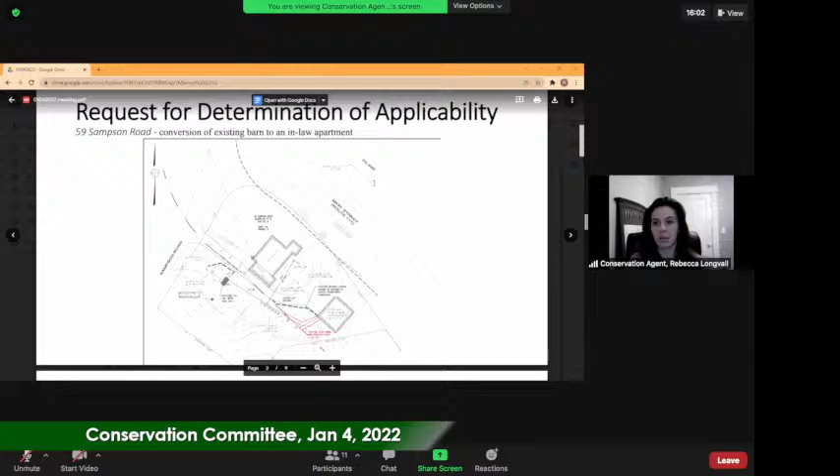I just saw your email about, he had sent me a colored plan, so he may be able to walk the commission through the project. I was curious as to what was jurisdictional, but if Ryan is able to explain that and give us an overview of what the project is and what we're looking at, that would be fantastic. Absolutely. Is it okay if I share my screen? That's fine, yes, if you're able, Ryan.

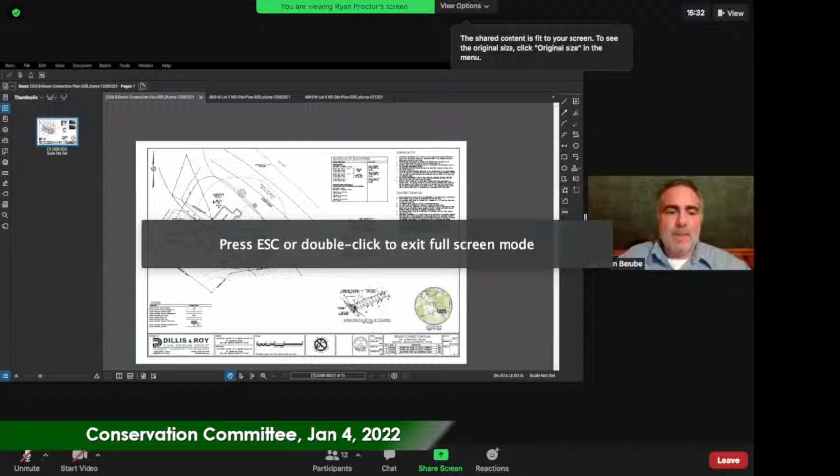Can everyone see the plan on the screen now? Yes, okay awesome. All right, so first off, thank you for your time tonight. Just for the record, I'm Ryan Proctor with Dillis and Roy, representing the applicant Brian Boyle. And as Rebecca said, Doug Story is here as well. So the proposed project, the applicant is proposing to convert the existing barn on the property into an in-law apartment, and that is going to require a connection, a sewer line connection into the existing sewer system.

A portion of the site indicated by the blue line shown on the plan, this is the 200-foot riverfront. And again, the 100-foot buffer zone eclipses the property a little bit. This is tributary to Still River, which is actually located across the road on the other side of Route 117. So as shown on the plan, we're right on the corner of Sampson Road and Main Street.

The area that's jurisdictional to the Conservation Commission, I highlighted in red here. There's just a little section of the sewer line from the barn into the existing septic system. Approximately 300 square feet of disturbance that we're proposing within the 200-foot riverfront area only. So there's no buffer zone work for this project, and again, it's just this little section here.

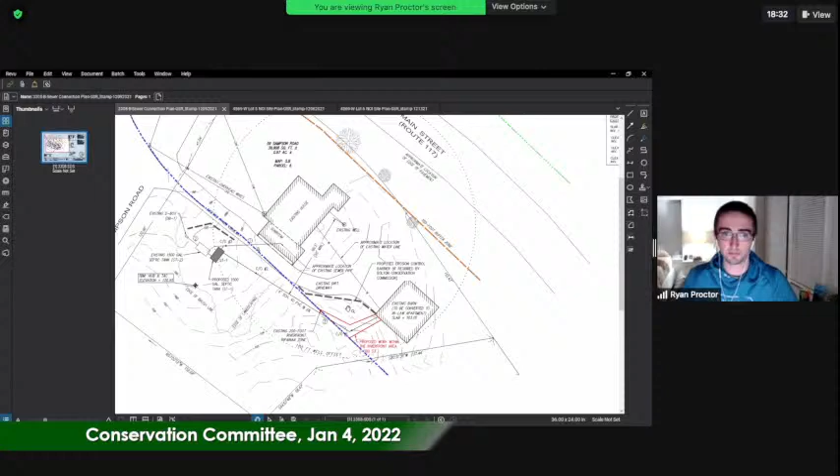We do show some erosion control. Wanted to kind of talk that through with you guys to see if you think it's applicable and necessary. There is quite a substantial natural buffer between the river by way of the yard. There's a fence along the property line, the crown of the road. There's quite a bit of structure in the way. And again, it is a pretty temporary disturbance, but that's certainly something that we're open to doing with the erosion controls.

We have submitted to the Board of Health. They had a couple of comments, which we've addressed and resubmitted. That was a little while ago, and we haven't heard anything back since, so I assume that we're all set with them. I think that's all I have to say about that. I'm happy to answer any questions or comments you may have.

I'm curious about the topography. Is it kind of going downhill towards Main Street, towards 117? Just looking at where you have the erosion controls. Yeah, in this tributary area next to the driveway here, this actually goes more towards Sampson, the way the contours are. So it's pretty unlikely that it's going to go directly down towards 117, where we're proposing the work.

I was more curious if anything would migrate the other way towards the 200-foot riverfront. Is that upland? So the high point of the site is this corner here. All right, so everything's more or less going down the edge of the driveway. It's almost going parallel with the riverfront, the line shown here. Makes sense. Other commission members, any initial questions or thoughts?

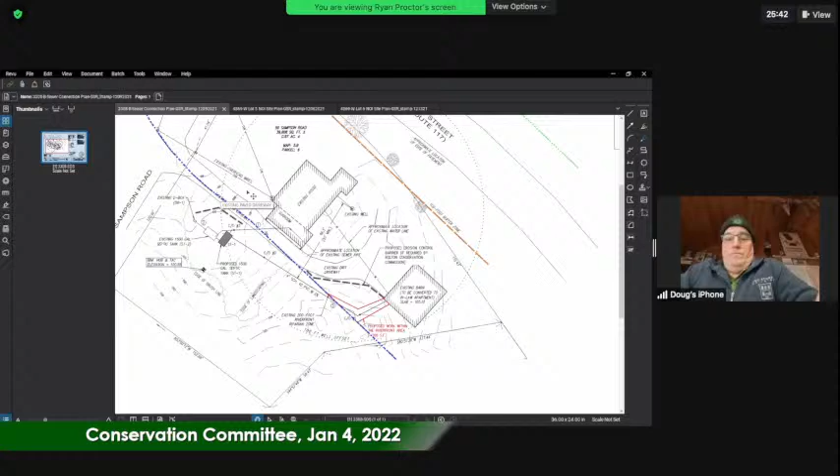As far as that's concerned, I think that's something that if the commission so chooses to, if they're comfortable with what's being proposed, I think that's something just to note, the square footage of that covered entrance in a condition. But if someone could find that while the commission's finishing their questions, I think that would be helpful, unless the commission has some outstanding requests.

Any other commission members have outstanding requests? That was a good question, Rebecca. And if we could find out the total square footage of that proposed area, or approximate total square footage, that would be excellent. I'm looking at that right now.

That's excellent. Can I ask it this time, Rebecca, is anybody here from the public to comment on this evening? Again, the public may raise their hand or utilize the chat function or physically wave, but that may take me a moment.

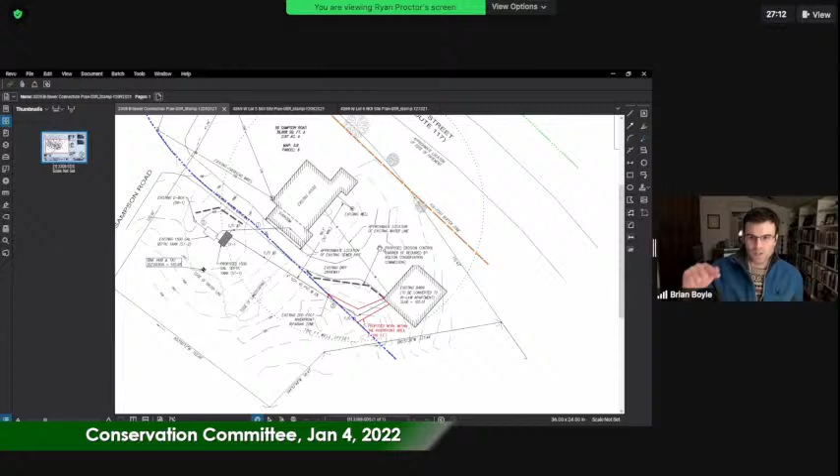Brian has raised his hand. Go ahead, Brian. Yeah, first of all, thanks everybody. Thanks Ryan and Doug for being here. I do happen to have a PDF version of the plans in case people wanted to see the covered porch, and I think the dimensions are right on there. So I don't know if somebody wanted to enable screen sharing, but I could share that.

You should be able to share now, Brian. If you'd be willing to do that would be great, I think. Okay, hold on.

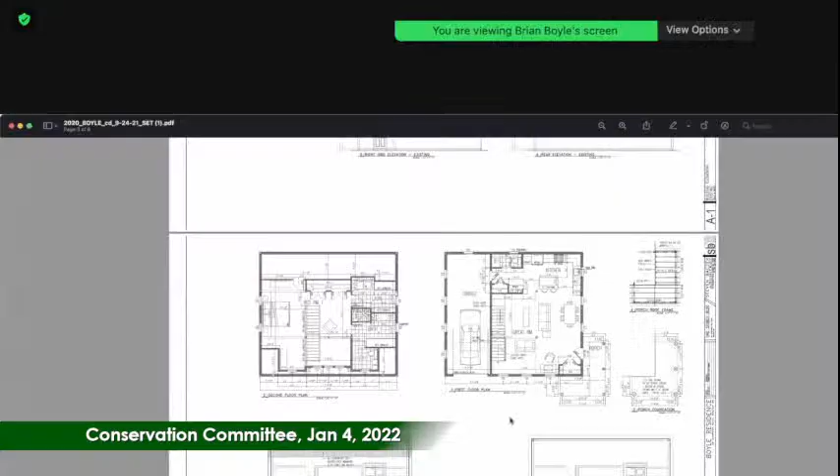It's oriented a little bit differently than you were seeing on the drawing, but this is the little covered entryway. So basically what it's doing is a relatively small wraparound porch to cover this entrance to the building. It's not going the full length of this side, and it's not going the full length there. So I think this looks like it's 8 feet if I'm reading these dimensions across.

Actually, roughly. I've got it, Brian. It's 5 feet wide in both directions, and in one the length is 11'9" on one side, and I think it's 13'2" on the other side. So it's a wraparound, it extends out 5 feet. It has 4 footings, as I said.

2 of which, or at least one, would be dug in the driveway. The other 3 would be dug on the side, and it only extends out 5 feet in either direction.

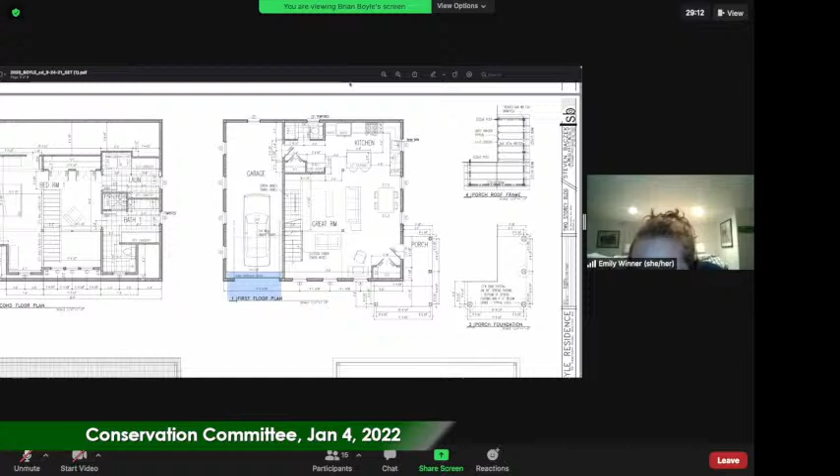Who's good enough at math to do the square footage on that quick? Okay, let me tell you what that is. I was gonna say what? Had a calculator. Well, because it's a wraparound, you have to do both and cut one off. It's 60, it's 60 plus. What is that dimension? 11.9 minus...

5, you said it's 5 wide? Yeah, so 7 times 5, 35. So 5, 60 times, plus 35, 95 square feet, approximately 90 or 95. Well, yeah, it's 5'10" wide, it's not 5 wide, it's almost 6 feet wide. So call it 6 times 12, 72, and then you're subtracting a little bit. So call it... what's it? 107. 107.

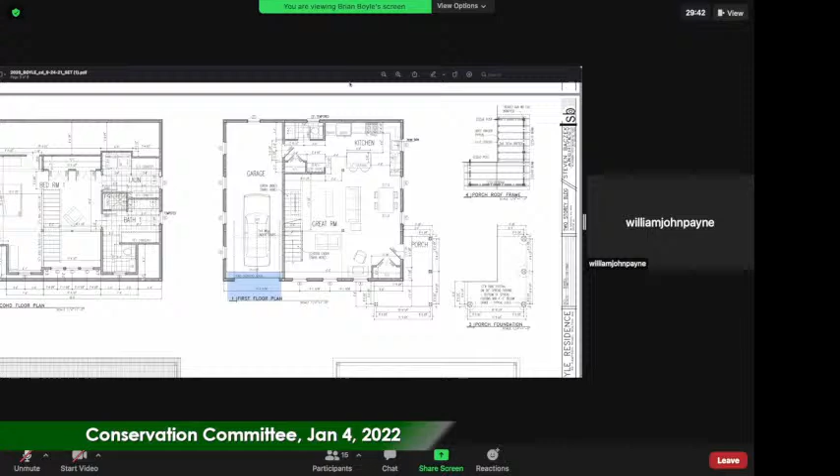So if we said not to exceed 115 square feet, that should give a little bit of wiggle room all around, that should work, right? And again, that's the side that's technically furthest from the resource area. It's on the uphill side away from the river, as I'm trying to picture how the two come in together. Okay, that's correct. Okay.

And again, I'll ask Rebecca on this one, I'm not as familiar with the site. Those erosion controls, I think straw wattles would be fine. Do you think they'd be necessary? Do you think there'd be migration? Because migration of the resource area, yes, but the resource area being the yard before it gets to the 117.

I will always be an advocate for erosion and or sediment controls whenever you're using or doing ground disturbance, but that's at the discretion of the commission. As Ryan said, and I believe the condition of where the alterations are proposed is currently lawn, if I'm not mistaken, so it's a relatively level area.

It's graded toward, the grade moves toward or drops towards the driveway. And then if you cross the driveway and across the yard to the opposite side of the house and barn, then it drops to Main Street. And then on the other side of Main Street, you have Still River. Right, so that's what I understand of the lot as well.

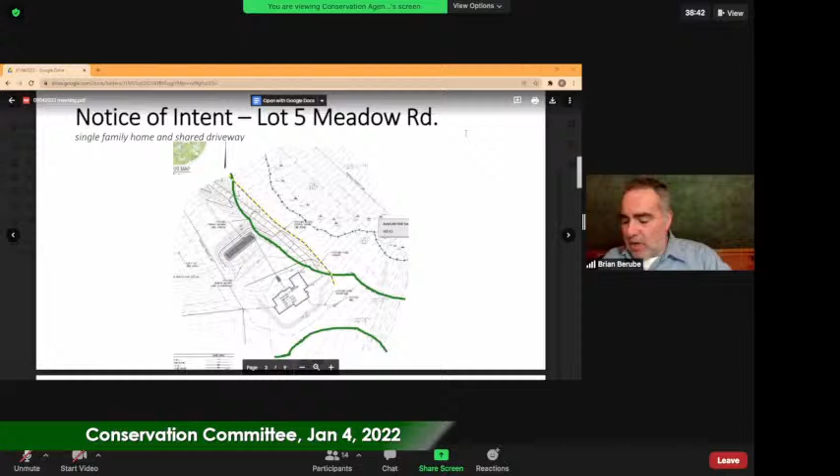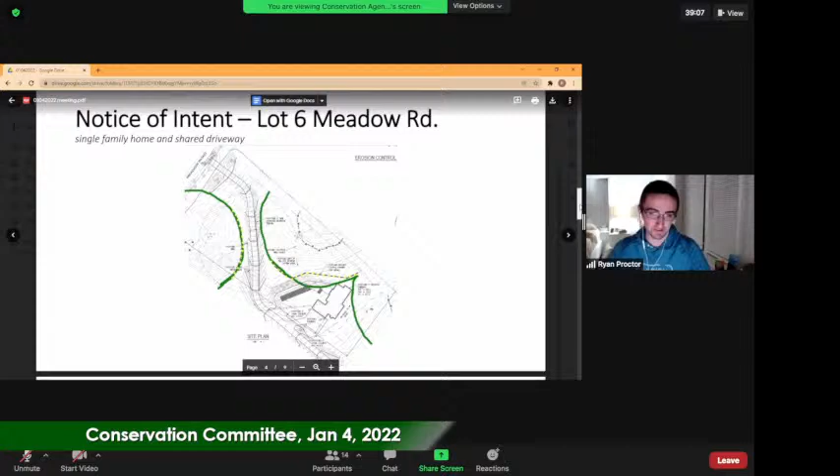Now that we have opened both, would you give us an overview of the project? Yes, I think it makes sense to start with Lot 6 here, so we can start right on Meadow Road. A couple months ago we were here for lots 7 and 8 of the same development; lot 4 was the one currently being developed. We're on the other side of lot 4 from where we were for lots 7 and 8. So we are on the northeast side of Meadow Road, and we have a shared driveway for lots 5 and 6.

I appreciate that you colored up the plan for me, Rebecca - I didn't do one here. But as shown on this plan, the green lines indicate the 100-foot buffer zones. There is a vernal pool located on the property line for lot 6 and lot 5, right there up near the road. Additionally, there is another wetland resource area along the abutting property on the other side of the driveway.

So the main focus was to avoid putting a driveway in the buffer zone. We've placed the driveway in the most logical place, right in between the 2 buffer zones for these 2 wetlands, as shown.

Similar to what we've done for the other driveways up near Meadow Road, we are proposing a couple of stormwater management areas to capture any runoff that might be running towards the road, to prevent it from running onto Meadow Road and subsequently across the street. So we're proposing 2 basins on the side of the road, again similar to what we've done on the other driveways.

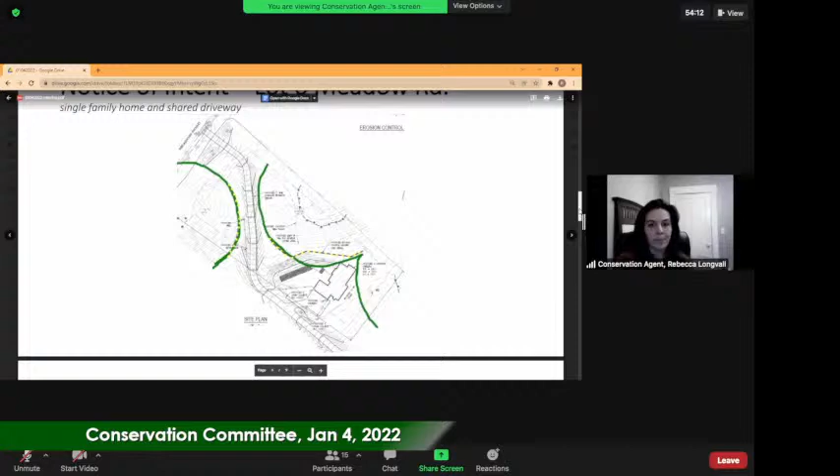I think the first lot—oh, wrong way, sorry, lot 6—you've come close to meeting that. There may be some concerns, as Brian said, that we need to add, or encourage you to add, some systems or maybe some nature-based solutions to address some of the runoff on site to ensure it doesn't get to the roadway. Again, I'm not speaking for the commission, but just when I'm reviewing these plans.

There's a slight concern that the well is so close to that 100-foot buffer, but typically drilling a well, you don't have too much disturbance outside of the point that it's actually being drilled.

Then the grading within the adjacent upland resource area, again, potentially a permanent disturbance, but I believe my green line here, my annotation, is actually over that line. So the septic, I just want to clarify for the commission, isn't itself actually within that adjacent upland resource area. But so that's really just keeping in mind that it is a resource area under the bylaw and making sure that you're understanding that you need to meet those performance standards, so that the commission can have a really good understanding of what's happening on site and how you're mitigating all these potential alterations.

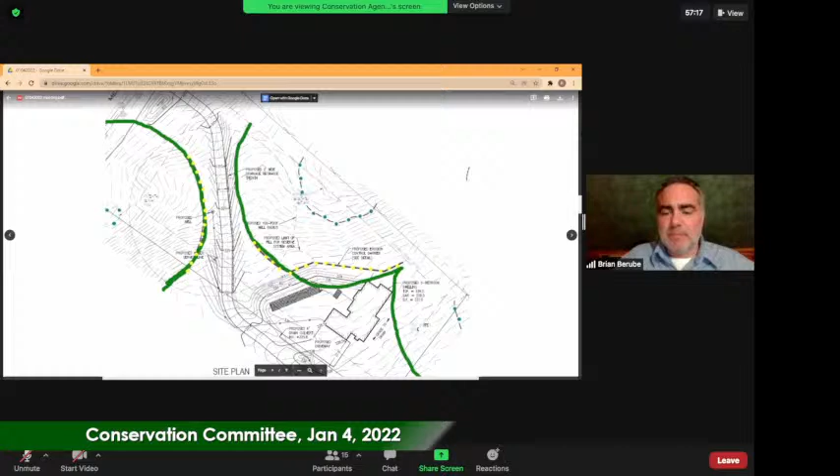Can we look at the other lot for a minute? Rebecca brought up a good point about pulling whatever can be pulled out of that 100-foot buffer. I'm curious if it's possible—this is just a proposed option—if the well is moved further back, and then the septic tank, the leach field can be, not the tank, but the leach field can be brought further uphill, and then you can get that driveway out of the buffer zone, or at least pull it as far out of the buffer zone as possible. Is that something that could be looked into?

Because it looks like there's a lot of room by the property line. Yeah, if it could be brought closer to the property line so you're still maintaining that 100-foot offset. Could everything move up toward the property line and then suck the driveway in, or even look into bringing the driveway into the front of the house instead of having the garage entrance off the side, which is pushing your whole driveway out toward the wetlands?

I think those are things that we encourage the design team to look at when we're trying to minimize impacts to the resource areas. So we want to know that every option has been considered and that we are investigating every possible option to reduce impacts.

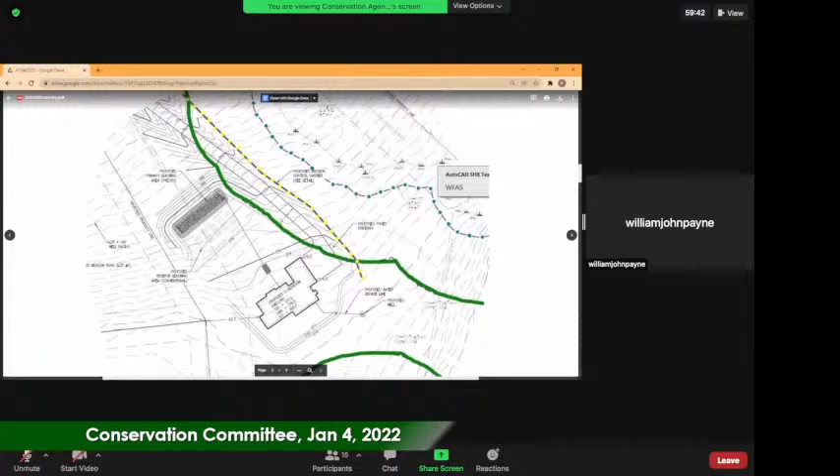Ryan, is it possible also for leaching fields, instead of being the long, narrow dimension that are shown, could you make them shorter and wider, or is that something that's standard? We could. Typically, we try to cover the test holes that we've done, so it's like fitting the puzzle into where the testing actually was performed. But that's something we can look into. We could do more lines and shorter length, definitely.

Any other commission member questions right now? Any members of the public here tonight want to comment on, I guess we're lots 5 Meadow Road now? All right, not seeing anyone.

And I know we don't have the DEP numbers, so Rebecca, if you would be so kind as to try to help us organize a site visit sometime within the next 2 weeks. I believe our next meeting is the 18th. Am I correct? That is correct. And what is our first available time? 7:30. Okay. Then Ryan, with your permission, I'm going to go ahead and continue these until our next meeting. Yep, that works for us.

In that case, I'd like to make a motion that we continue the public hearing for Lot 5 Meadow Road until our next public meeting, Tuesday, January 18th, 2022 at 7:30 p.m. Do I hear a second for continuing? Second. All those in favor, starting with Emily, Aye. Bill, Aye. Jillian, Aye. and Rebecca, I am an aye as well.

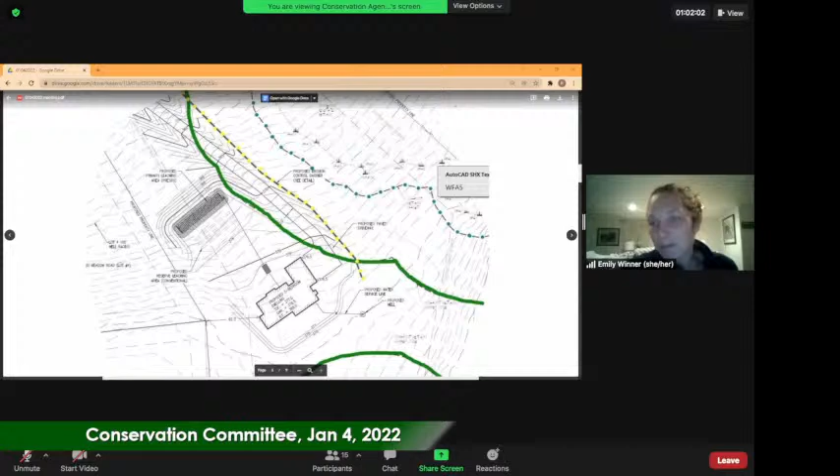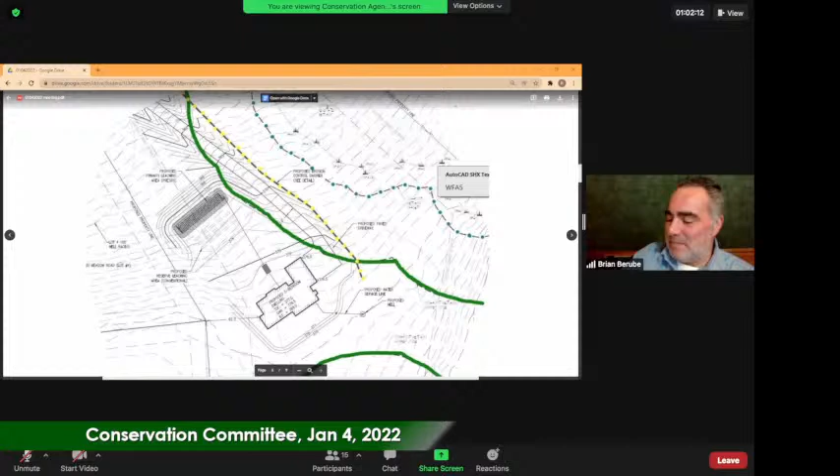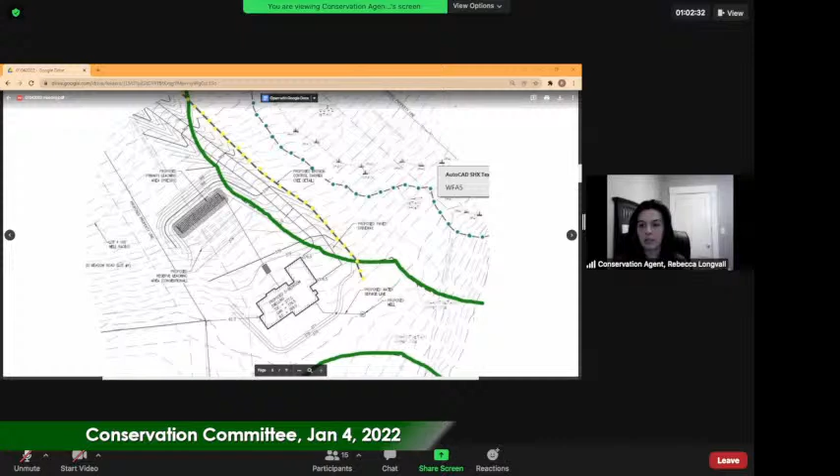Wonderful, thank you. Thank you. And Ryan, I will be coordinating with you once I hear back from commission members individually on their availability, and hopefully we can get that done within the next 2 weeks. That sounds great. All right, thank you. Thank you. All right.

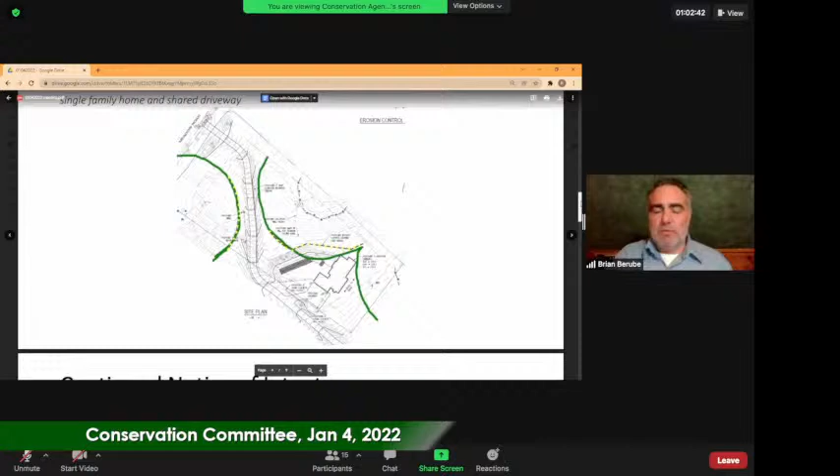Rebecca, are you ready to continue? Yes. That's good. All right.

The Bolton Conservation Commission will now continue the public hearing under Mass General Law, Chapter 131, Section 40, and the Bolton Bylaw, Chapter 233, to consider a notice of intent filed for Century Mill Road, map 3.D, parcel 75, regarding the proposed construction of a single-family home and the widening and paving of an existing gravel driveway.

Do we have an update on this project this evening, or the applicant or somebody representing the applicant here tonight? Yes, I believe Rachel and Matt Watsky are present representing the applicant.

Good evening, I'm Rachel Watsky. My Zoom starts as Matt Watsky, so I have to change it. So he's not here. It's just me and Dean Charter, the arborist, who did the report that was submitted at the prior meeting. I do apologize for the terrible lighting for me. Sorry, first time doing a Zoom meeting from home. Normally I'm at the office and I don't have any overhead lighting in this room apparently.

But basically at the last meeting, my impression was that the commission wanted to have an updated site plan that showed all of the trees, not just the ones to be removed within the line of work on the driveway.